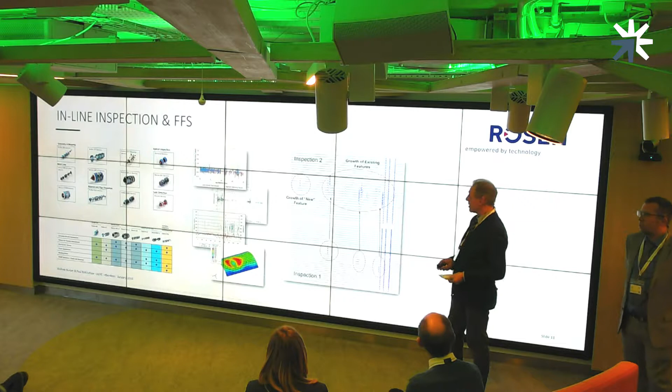These days, with inspection tools, the resolution is increasing all the time, a little bit like 4K on your telly. We can do quite smart things now. We can render inspection data into quite detailed 3D images. How useful that is, I don't know, but it demonstrates the level of resolution we can achieve now with some of the magnetic tools on the market. So yeah, we've got a lot of tools in the locker.

And Andrew, I know, is feeling a little bit impoverished about this from a flexibles perspective, because at the moment there isn't really that level of inspection possible with a flexible. So since his time here, Andrew's been working hard to get some attention within Rosen to come up with an intelligent pig for flexibles. So I'll hand over to Andrew to talk about that.

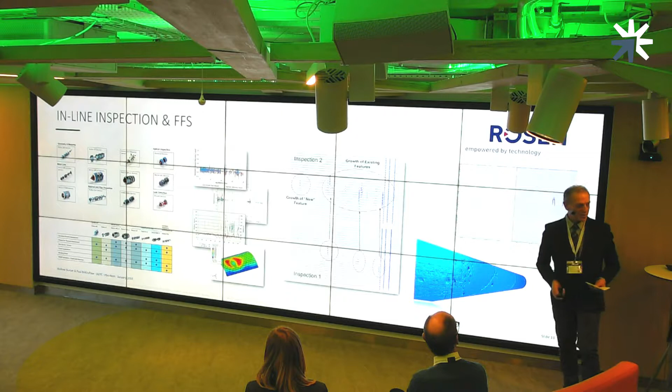So, brief background: the pipeline on the right-hand side, the blue pipeline, at the end of the Second World War was used to move diesel from England to France. And obviously a standard flexible pipe structure that's evolved from probably the mid-1980s, following API 17J and the ISO standards. They are predominantly all around the world now, used on all floating assets, so they are key to production, and they need to be managed in a way which means they can extend the life or mitigate failures.

At the moment, inspection technology falls into about four bands: internal visual inspection with cameras; external visual with your ROVs; external NDT methods, with certain technology for external flexible pipe to measure certain aspects; and annulus testing, one of the most common ones. But they only give part of the answer, and if you don't get the answer right, you can end up with significant failure. So why do we look at technology? The technology from a flexible point of view now is to remove uncertainty.

All the technology on the left-hand side, probably from about 10 or 15 years ago, is driving to remove that uncertainty. If you don't remove uncertainty, you've got production reduction, you have to limit the vessels, run some risers or flowlines for certain aspects, remedial replacement or even decommissioning, which drives costs, and replacement drives costs.

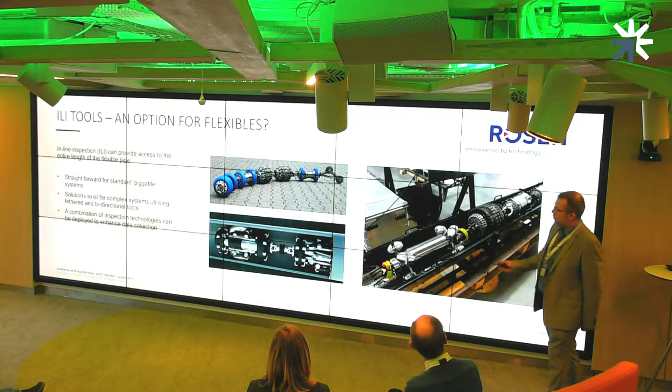So this is a brief background on why we're looking at layers. This is an extract from the SureFlex JIP, which was from last year. And when you look at the review, you come up with 4 groups. The 4 groups we've got are the carcass layer, the pressure sheath layer, the tensile and pressure armour, and annulus flooding as a group. But the annulus flooding is so impacting on the tensile and pressure armour that you could move them together as one.

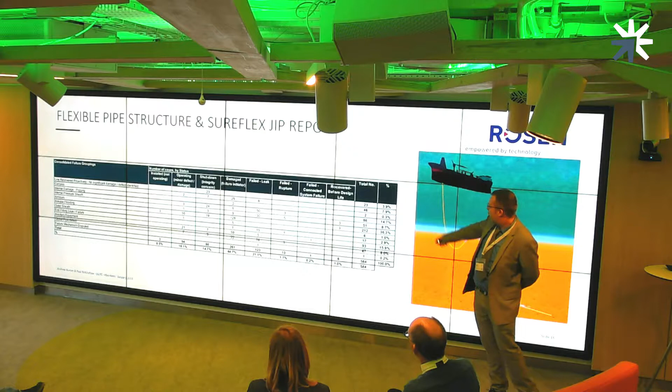And this gives you just a brief view of the quantities of flexible pipes that are failing. See in the bottom corner here, there's 580 flexibles failed over the period of time. And the groups are clearly seen there. There's 10% for carcass, you've got 15% in the pressure sheath, and then you've got the major jump when you go into the carbon steel layer.

So Rosen started with getting a section of flexible pipe. We've got a real-life bit in Lingen, Germany. It's 15 metres long, and we've used this as our test pull-through sample. So we've been putting pigs through this section and extracting the data from it. What I'm pulling up here is the data from an ILI tool passing through a flexible pipe. On the right-hand image, you can see the start of the flexible pipe, then you've got the main body through the end fitting, and then you've got the carcass wraps, and it's depicted on the bottom image there.

And on this image here, we've got a visual inspection of that bore. I'm just pulling up the technology. It's very difficult to identify in the top image, but we are picking up very, very fine detail when you look at flexible pipes from a technology point of view.

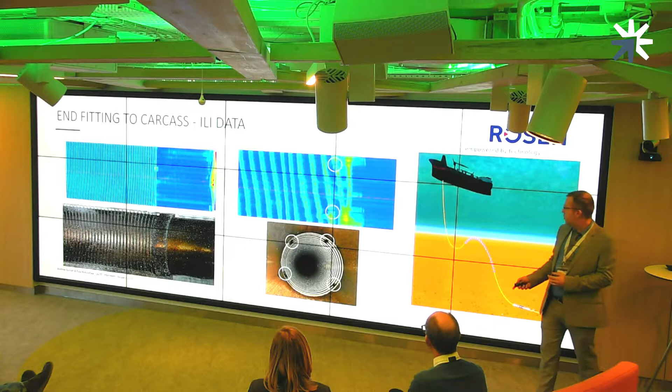So on that 15 metre long sample, we did some pull-through tests. We were able to measure the pitch and gap of the carcass profile. On the bottom there, you have a representation of about 1 metre of flexible pipe, where the light blues are the flats of the carcass and the dark blues are the valleys. The technology and the software has measured them and logged them all out for us. There's different run speeds in here at different times, but we've got a pitch and gap of between 19.5 and 21 millimetres.

What you want to see for your entire flexible pipe is that being maintained for the entire length of the flexible. What you don't want to see, from my perspective, is sections of compression, so it bands down for a period of time. You may find you've got a section of extension, which bands up for a period of time, or even losses of interlock, which will show as significant jumps in the data set. These issues may occur at hog bends, sag bends, touchdown points, or generally just tearing of the carcass, resulting in collapse or blockage of the flexible pipe.

What we also want to do is look at defects which you see in more standard rigid pipelines, which are corrosion features, etc. So what we've done here within the lab environment using the sensor is we've got a series of circumferential and horizontal defects in a carcass section and a couple of other little bits here. One being a weld spot defect, measured out corrosion, and the one right here for erosion.

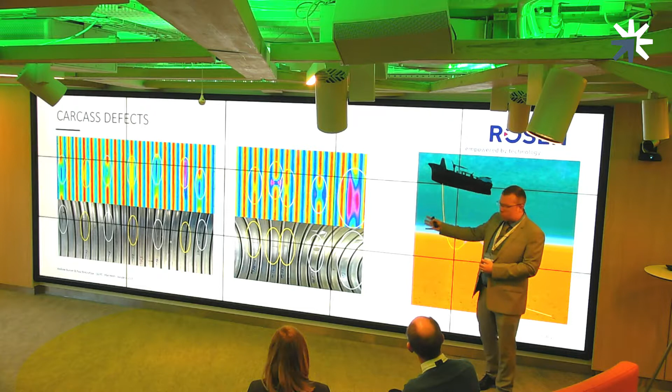You can clearly see from the data sets again, we are picking up the valleys of the carcass, but we're also picking up the circumferential and horizontal defects within the data. Now this might be carcass tearing from a manufacturing process. Once it's being made, you can't physically see inside the flexible pipe. It may be things where horizontal weld cracks occurred with the carcass manufacturing, again not being picked up. But then the stuff that may impact more is the corrosion cracks that occur during operation of the flexible pipe.

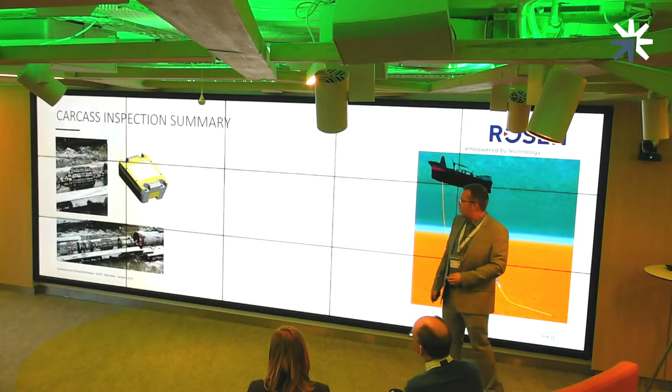So in summary for the carcass layer of the flexible pipe, we've developed a new sensor, the DRD sensor, and for us this technology allows us to get the carcass pitch, circumferential damage, longitudinal damage, erosion and corrosion. So we're covering that internal layer of the flexible pipe now. And as you can see on the left hand side there, we've got a snapshot of the ILI tool that we used on the pull test, and the DRD sensors are mounted around the circumference of the bars.

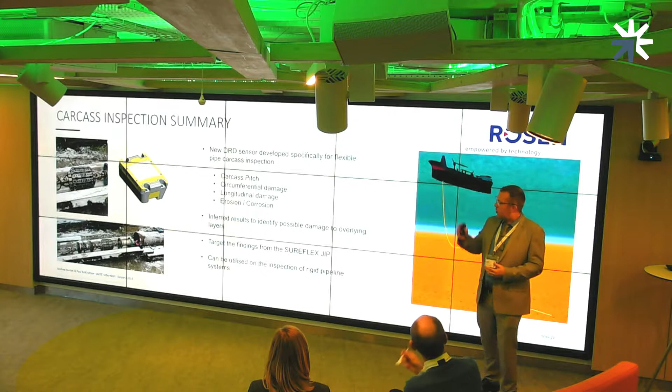One of the important things I wanted to do when I did this exercise was to make sure we weren't losing the value with respect to the rigid pipelines. So this ILI sensor can be used on rigid pipelines and flexibles, which means there's only one tool going through a flexible rigid system or a complete flexible system. There are a few in the North Sea where you've got rigid and flexible risers, or steel risers and flexible flow lines on the seabed. Then this can pass in one go, with all the information.

Just moving on to other data that Rosen have identified during an inspection run. One of the interesting ones would be something like the mid-water arch, or the entrance to an I-tube on a vessel. Since the magnetic field is so heavily distorted as you pass through that steel boundary, you can detect where the mid-water arch clamp is, and you can determine that it hasn't moved with respect to riser configurations.

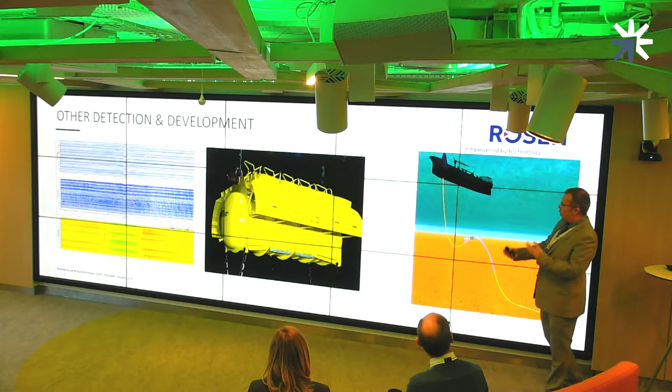Now, looking forward as well, can we do things with buoyancy modules on systems? Can we put in a way to measure the location of buoyancy modules, which supports the idea of loss of buoyancy modules, them bunching together, or being placed correctly during installation? Try and put all these systems together in a simple pass-through.

The next area in the flexible pipe is generally the most concern, which is corrosion of the pressure armour and tensile armour layers and associated fatigue and failure. And this is what's most commonly happening around the world. One of the challenges with that is it's not as easy to get to as the carcass layer. You've got to get past the carcass, past the pressure sheath, before you see the pressure armour.

So what we've been doing is working on sensors and technology to allow us again to measure the pitch and gap, looking for loss of interlock, which is one of the main concerns for the pressure armour. And then when we're looking at the tensile wires, we're looking again at the lay pattern of the tensile wires, to make sure that there's a coherent pattern, there's no snapping, there's no bunching, and try to bring all that information together.

So what we've done here is we've modelled this in a lab environment with a section of pipe, and we've used 15mm as an offset from the sensor to the carbon steel. It's about typical for most flexible pipes. There are obviously some smaller cases, and some more extreme distances, but that's a representation. So we're busy working on a new magnetizer at this moment in time to try and get that magnetic field further through the flexible pipe to collect more data.

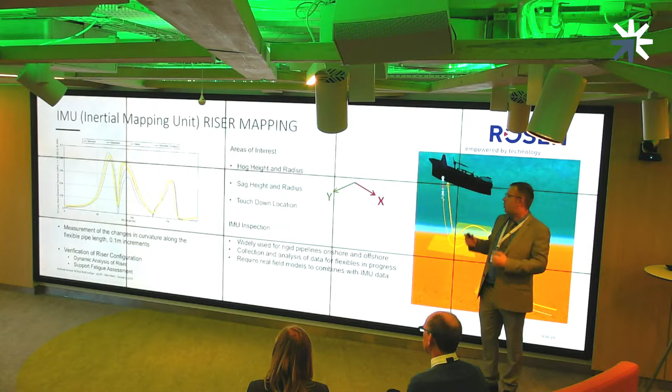One other thing we're looking at, and Paul mentioned it there with respect to onshore and IMU mapping, is rigid pipelines are mapped every day for topography across the ground to check for ground movement, so you can pick up the strain, etc. within the pipe. So what I've been looking at is, why can't I collect exactly the same information for a riser profile or seabed profile to check for strain locations?

With the riser profile, we're saying, if we can map a riser profile, we can compare it against the original analysis, and therefore we've got a snapshot in time of that flexible pipe as it is in the water column.

And one of the biggest challenges with modern flexible pipes is its bending stiffness. It varies so much depending on whether it's in a certain part of the performance curve, and whether or not it'll conform to this configuration.

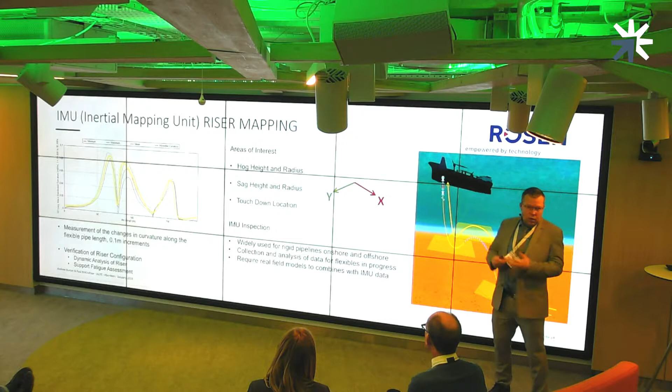So we're looking at using our IMU data to map the riser, and that information can be fed back into analytical software. We run the fatigue analysis, dynamic analysis as well, but also things on the seabed, making sure there's no tight bends anywhere, it's not being kinked anywhere, and trying to pull more information from the inspection run.

And I guess from the end of the presentation point of view, this is where Rosen are looking to move to, but obviously we need the industry to turn around and say, we've got these challenges, and how do we help support to address those challenges. So what I've presented here is obviously Rosen's highlight tool. I've also presented external technology that's there. And there's also going to be a complementary point where the technologies work together.

We can pass through a flexible pipe at around 1 to 2 meters per second. So most flexible pipes are covered within 10 minutes of the ILI tool entering the flexible pipe. We may find discrete locations, like finding dents on caliper tools as we use on rigid pipelines, and then you can maybe look towards a more bespoke external technology to home in on features that you can't identify.